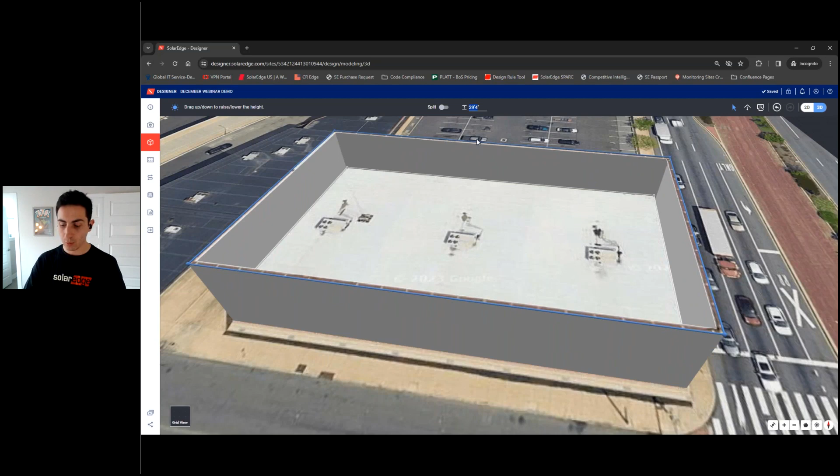That's the outside parapet here. I'm going to use the undo function, Control Z, just like you'd expect with keyboard shortcuts, to bring that back down to a flat roof. If you double click on the outside edge, it's going to highlight everything within one facet. So I'm going to set the roof height for the outside edge to 27 feet and the inside edge to 25 feet.

This is just measurements that I know in advance for the webinar here. Now you can see, again, hold down your middle scroll wheel to rotate the image and see how your building looks.

I'm going to go back to 2 dimensions, and now we want to add some obstacles on the actual rooftop itself. Under Draw Obstacles, you just click there and then click on one corner, hold and drag to create a rectangular area around your obstacle, in this case this little AC unit. I'll make another obstacle for what I think is a rooftop hatch.

So copy and paste again with your same keyboard shortcuts. You can Control C, move your mouse to where you want to paste, then click Control V. I'm going to delete that to show you one other method.

First, we'll go over here and set the height of this obstacle. The AC unit, let's call it 6 feet tall. The rooftop hatch, probably half a foot tall. Again, we're not going to be super precise in the interest of time in our demo today, but of course, all of this you can go and make exactly the heights that you need to.

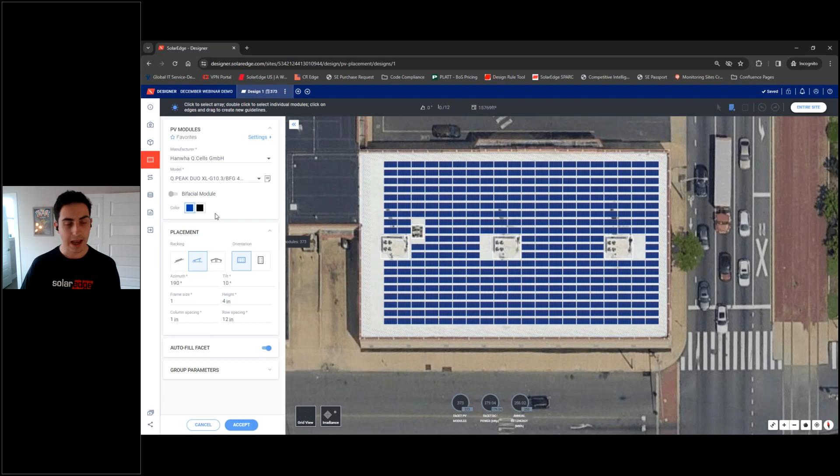So what you can do is drag and drop an area to fill panels. This is one way of doing it. The way I like to do it generally is to use the autofill toggle here, and it's going to maximize panel on the rooftop space. So this is maximizing your space on the rooftop, and then I like to go through and delete panels that we don't want here.

First thing I'll do is grab these panels right next to the AC units and create a walkway all the way through so that any maintenance personnel has access. Click on one module, use the corner to drag to however many modules that you want to capture, and then just click delete to get rid of them.

So we're going to get some space around these AC units so that people can work around them. I'm not sure what this shadow here is, but we'll give it enough space, just in case that shadow is going to affect our modules. You can drag the entire array, but it's automatically going to cut off modules that fall within the keep out areas, if that's the setbacks or the obstacles.

One more feature I'll show you is the irradiance feature. This uses data from the nearest weather stations to estimate how much irradiance you're going to get depending on shading throughout the year. In these yellow hotspots, 85% means you're going to have 85% of the module's absolute maximum production for the year in this location. When you get really close to these purple spots that are more heavily shaded, a lot less production. That's going to help us in deciding which modules we want to keep and which modules we want to get rid of.

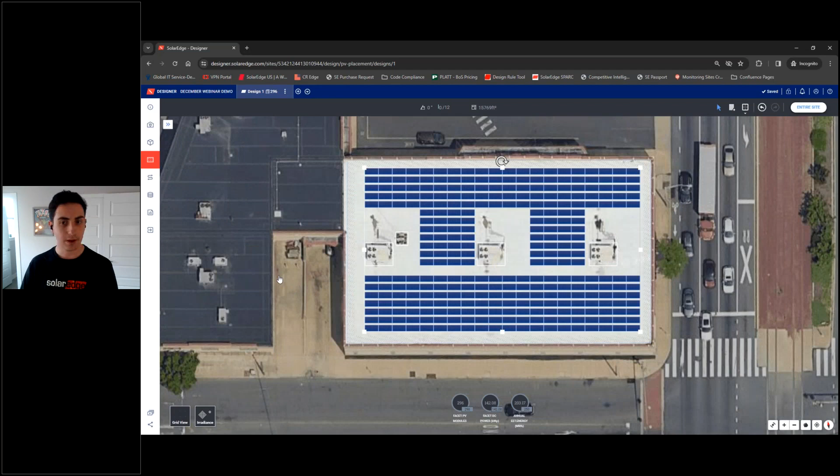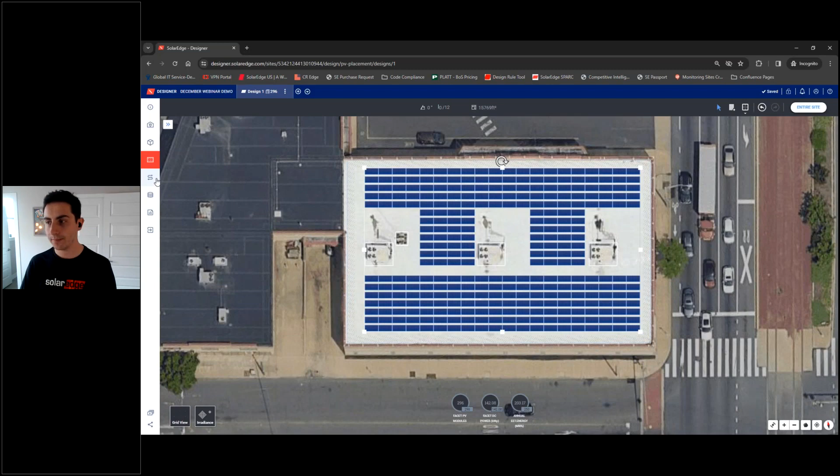So for a quick system, it comes together pretty quickly. I think this is a pretty nice looking array. Obviously, if you want to spend a lot more time optimizing it as much as possible, more than welcome to do that. But to slap an array on a roof in 3 to 5 minutes or less, this is a pretty good start. So we'll move now to the most, I would say, important part of the process, and that is the electrical design.

Right away, Designer is giving you recommendations for what optimizer and what inverter can be used with this site. That's based on two things: first, the stringing zone, and the oversizing.

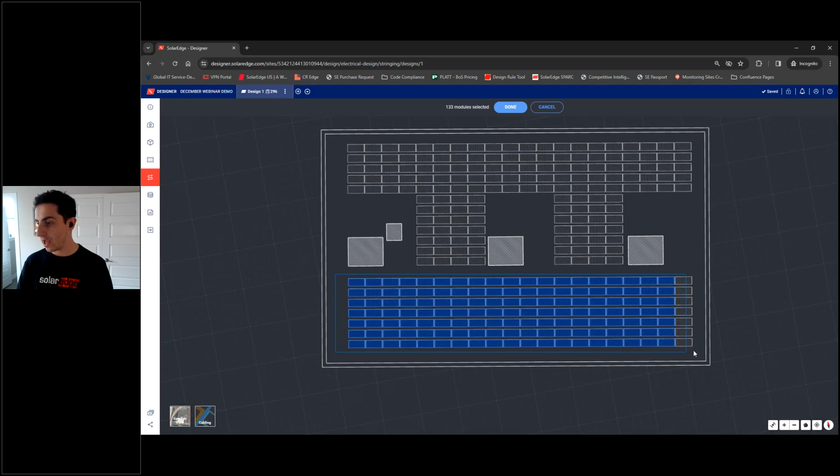So if you wanted to, for example, edit your stringing zone, let's say I just want a recommendation for this bottom subarray. It's going to be 133 modules, and it's going to suggest different inverter sets for you. In this case, 2 SE30s. I think it makes more sense to wire this all onto one inverter. It's a pretty small roof, so we'll reset to all.

And here we can modify what is our desired DC to AC ratio. Let's say we wanted to bring that down to 115%. It's going to change for us what the inverter is that's being recommended. Okay.

Designer is only ever going to recommend you compatible equipment. So given the module we've already selected, it'll recommend only a list of compatible optimizers to go with that module, as well as with that inverter. So everything that's being recommended and selectable as an option, the compatibility concern is taken care of.

So I'm going to select the S1201 optimizer, it's kind of newer, with a little bit of extra features. And then we'll click...

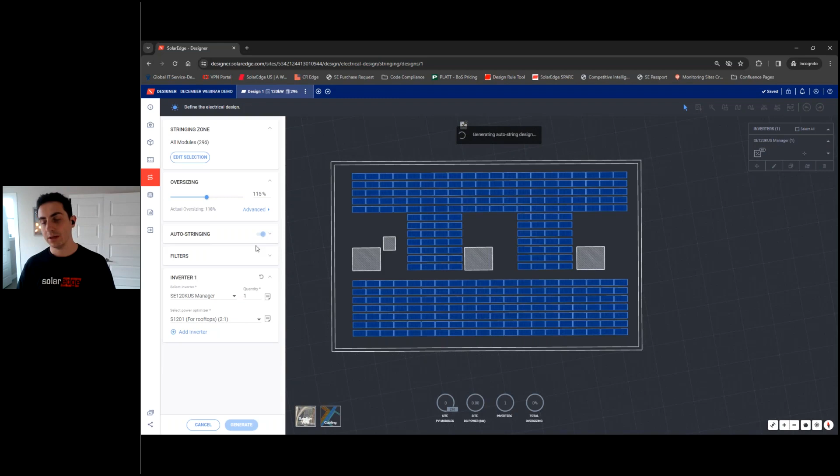Auto stringing. I like to use the auto string to get a basic stringing design built in, and then I can go through and manually make changes as desired. So we'll click generate. You can see a fully strung design is already given to us.

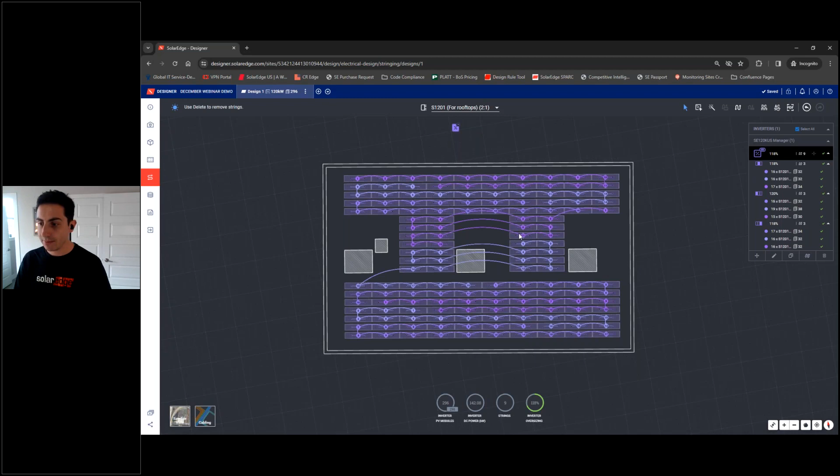What you're looking for in the electrical design section is that everything is valid. So green check marks on every string, every inverter subunit, and the main inverter itself means that this design is considered electrically valid according to SolarEdge design rules. If we make a mistake, something that isn't valid, it's going to pop up an error notification and let us know that there's an error and that the design isn't valid.

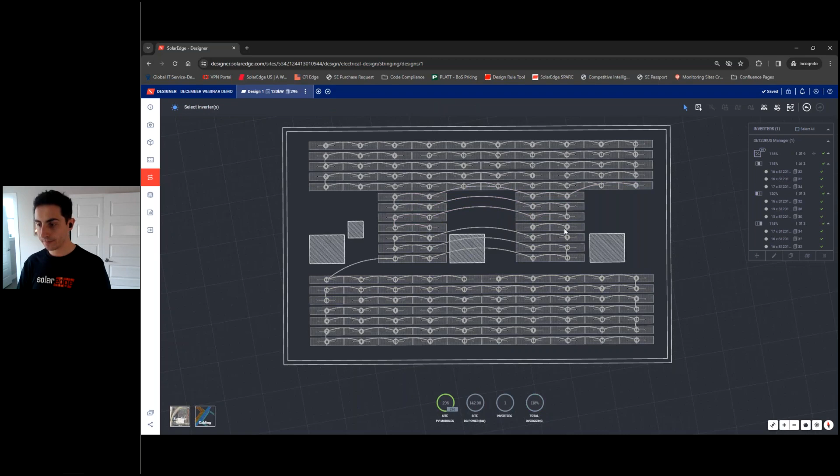What I'm going to do is get rid of these 2 strings because I don't love stringing across the obstacle area. So I'm going to delete those 2 strings that come from this left side unit, and we're going to put those in manually. So how to do that?

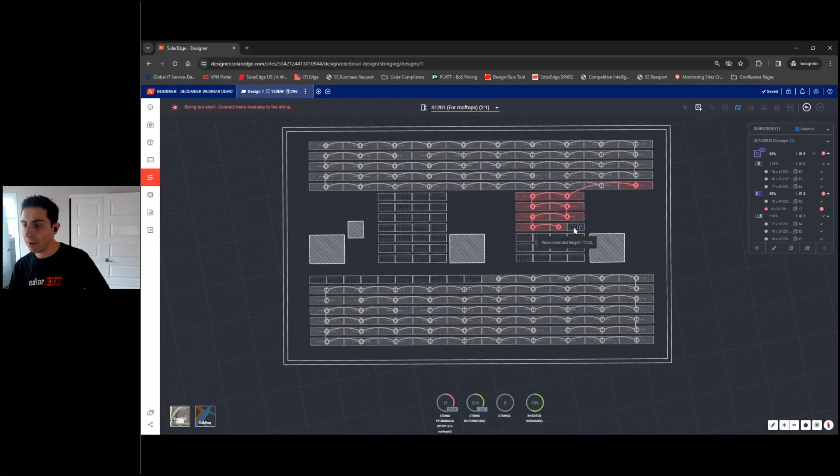The basic way of manually stringing is just a click and drag. You'll click down on the first module that's part of a string and drag to the next, and you'll just go all the way through. You can see right now the string is red because it's too short, and on the right side you can see there's a little red exclamation mark. That error is because the string is too short. But as we build it, make it longer, it'll come within the necessary minimum length for a string. And there we go, that string is now totally valid.

You'll notice that this string has 30 modules and the other string on this inverter has 32 modules. With SolarEdge, you have the flexibility to build strings in parallel that aren't exactly the same length, because the maximum power point tracking is happening at the optimizer level.

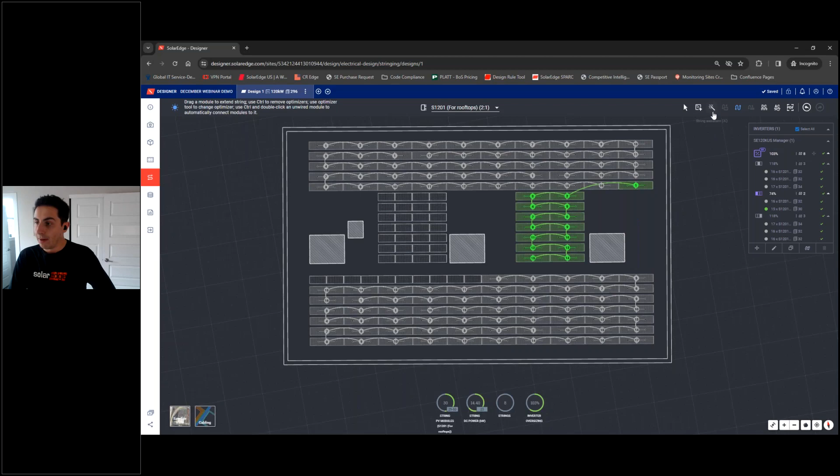As Varsha noted earlier, the magic wand stringing - this is also my favorite way of doing stringing. Basically you click at the beginning of a row, and it's automatically going to string the rest of the row and ask you for the next place to start. So I'm going to click here, and it's automatically going to string us through to what it's decided is the optimal size, 32 modules, and finish the string.

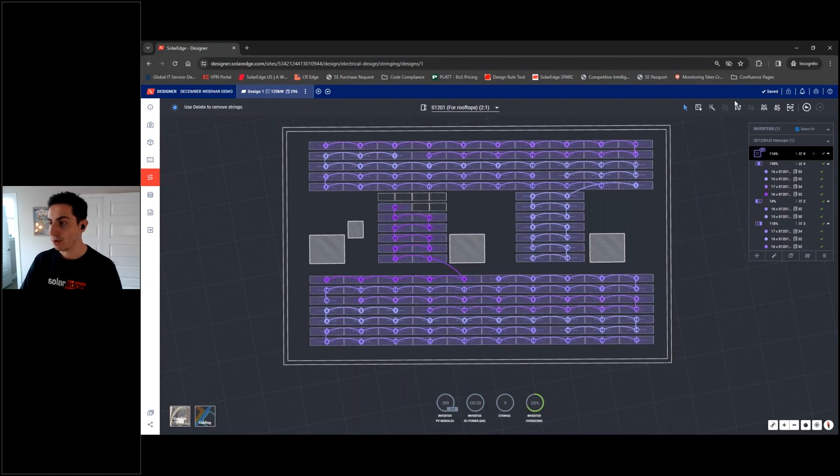What you can do is go back to the manual method, grab the end of this string, and add the additional modules so that the entire system is wired. Again, you'll see this one is a 38 module string. I want to drag that down here so that it's 3 strings on each unit. I think with a lot more time, we might be able to make an even prettier, tighter, more balanced system where every string is the same size - easier for our installers to not get tripped up along the way.

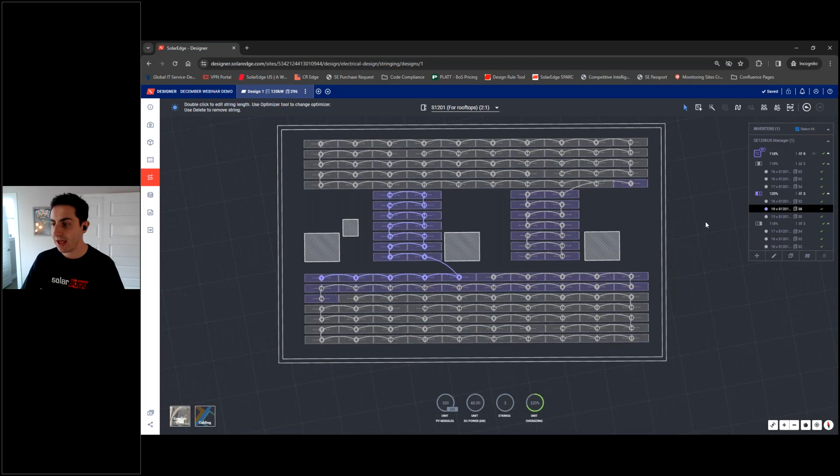But as you can see, everything here is valid, and that's the main thing that we're looking for. I'm going to move over this inverter to a likely ground mount location so that I can show you one other exciting feature on the electrical design page, and that is the DC cabling feature.

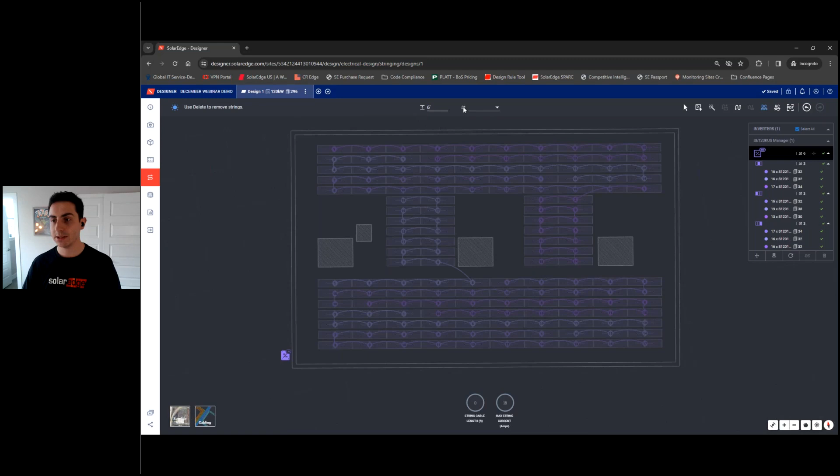So when you click on the DC cabling, it's going to ask you for a relative inverter height. Let's say the inverter is mounted 6 feet off the ground. And what's the cable gauge for our home run? So 10 gauge copper seems likely in this case.

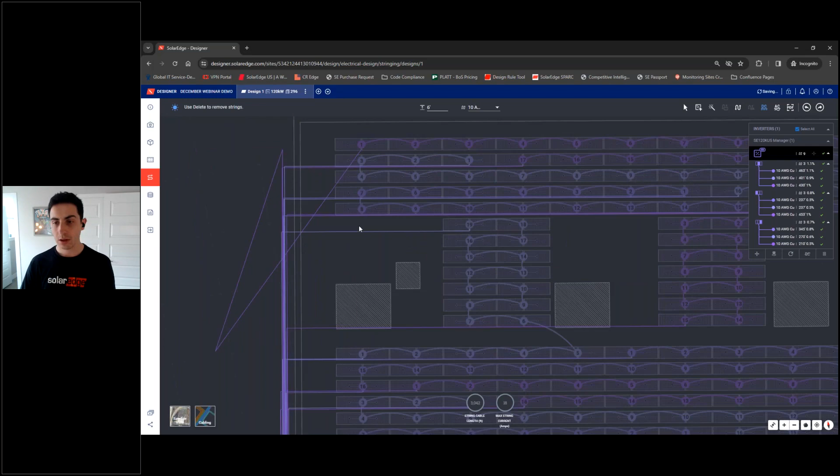And you're going to see that the DC strings here are all laid out from your module strings to your inverter. If you want to route them specifically, you can grab on a string and change its routing. Obviously, no one would route quite like that, but you can just Control Z to undo and put it back to this nice 90-degree routing, which is reasonably likely to see on a site.

You can add DC combiner boxes, and change the string sizing from the DC combiner box.

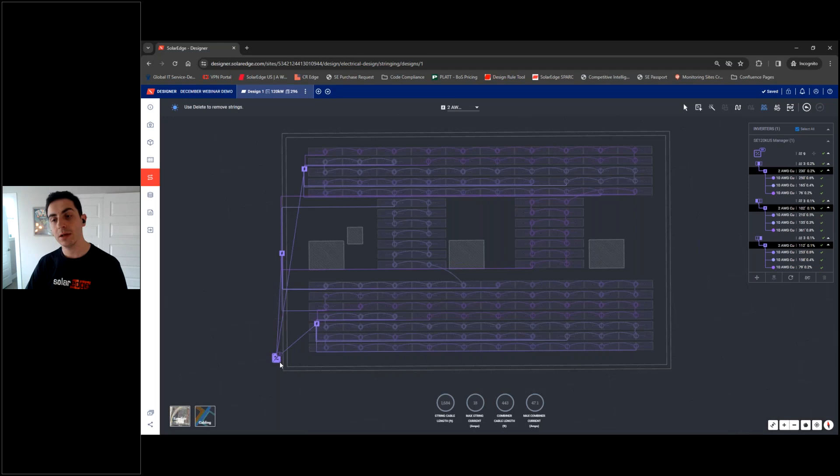We'll probably use something larger if we're using 3 combiner boxes for 3 synergy units on this inverter. So all of this stuff is really nice.

AC cabling side, you have the same features. So from your inverter to your grid interconnect point, you can mess around with the sizing of the inverter cable or the PGC cable. I'm going to clear the AC cabling for now.

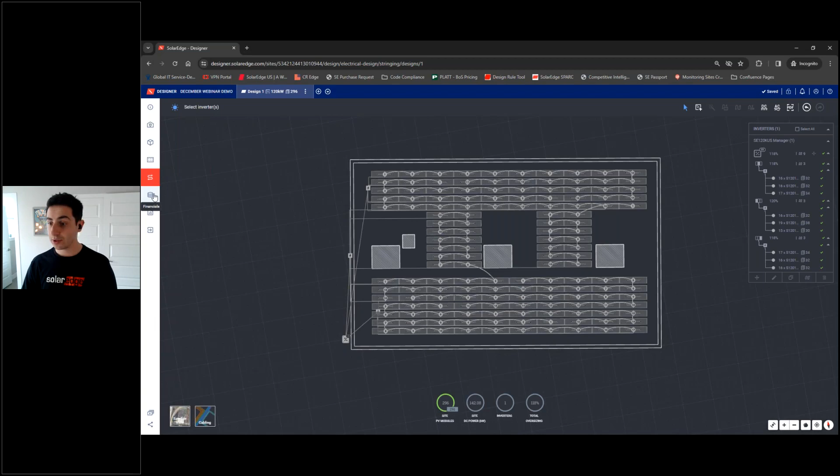All of this is really nice going into our next step, the financial analysis portion. What you're getting from the cabling side is a really solid estimate of your balance of system components—how many feet of 10-gauge cable we'll need for our home runs, 2-gauge cable, combiner boxes, all of those electrical BOS components. The designer can basically create a BOM for you.

You can even export it as an Excel file. You can estimate the prices for those components, and you can save certain part numbers that you use often for those components, all under your profile.

For the sake of time, I'm going to estimate the entire system price. Let's call it $250,000 here, and move on from guessing the CapEx costs of our system.

We're going to add incentives as they are available. Obviously, the ITC is available everywhere in the country, and you can add state-based incentives as well. If you don't have your incentive listed, you can include the specific information about it down here.

All these financial parameters are part of the production simulation and ROI analysis. How long do we expect the system to last? How much are we spending on O&M costs annually? How much does it cost to replace the inverter? This is actually based on the warranty cost in this case.

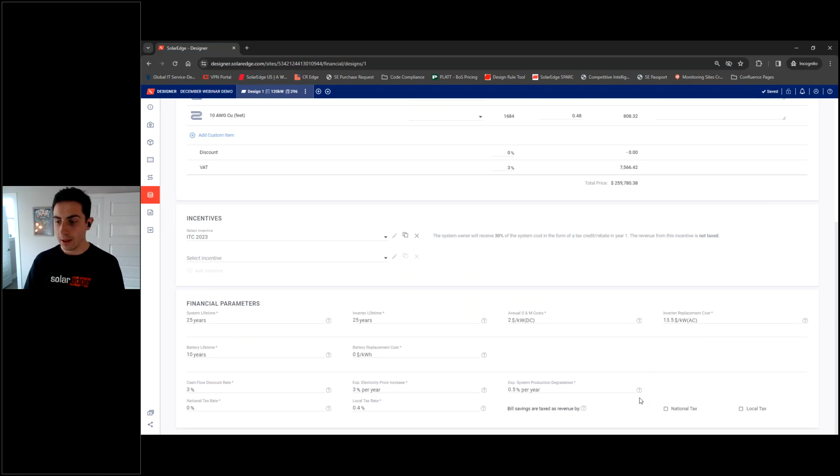Battery is not relevant for this system, but some smaller systems might make use of batteries as well. All of these minor pieces I'll allow you to look through at your own time—I don't want to take too much time explaining each one.

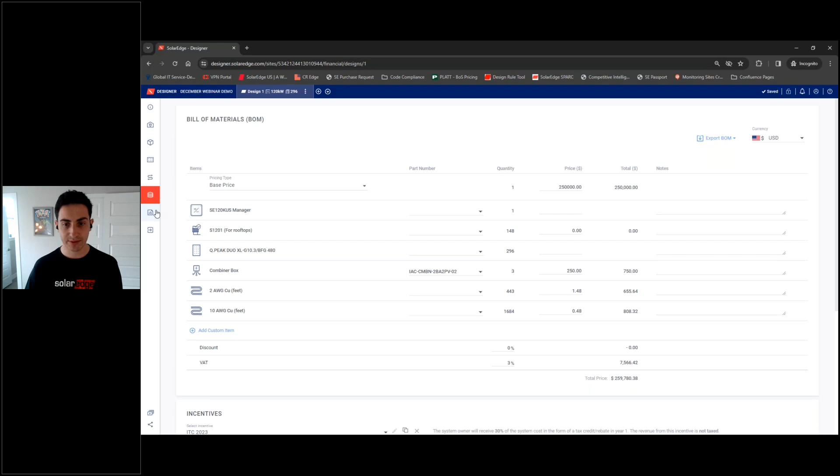But all of this input up till now, both on the financial and electrical design, module placement, everything, builds up to this step, which is our summary and report tab. Right now it's running the simulations, ROI calculations, and generating a report of the system.

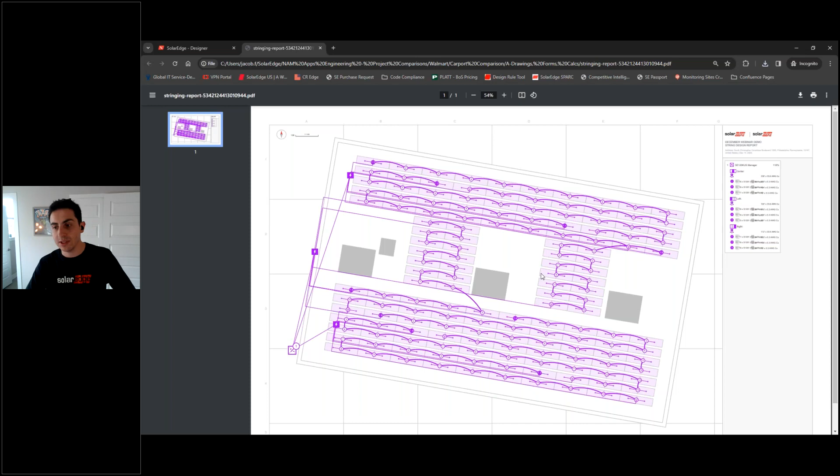So if you wanted to download a PDF or DXF version of the layout, I'll just open it up for us to look at—it's going to look something like that. Same thing in the DXF version. So if you have a drawing set that you're building, you can use this as a basis for that drawing set, or slide it into the drawing set somewhere.

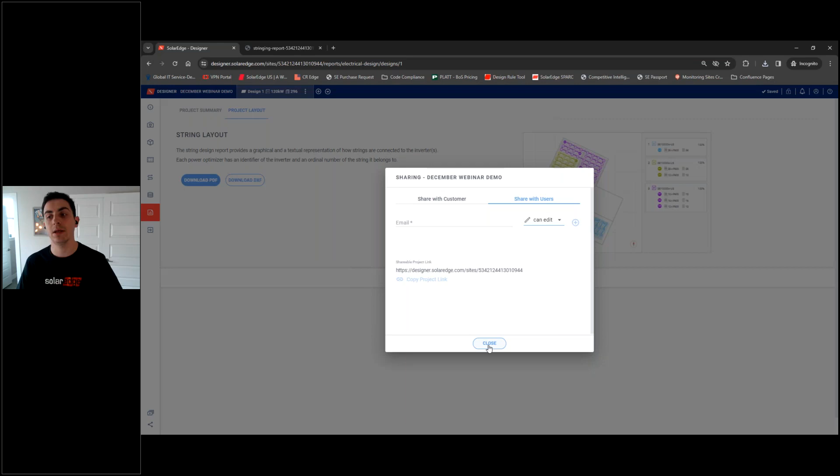Finally, the sharing feature allows you to share either just the proposal, which is what the report looks like, or the link with a customer, or with other users, partners or members of your own organization. If you select can view, then they can view everything, including any of the tabs or inputs. Change it to edit, and they can make changes just as you would as the project owner.

The final step is the export. So once you're all good with your design, you feel confident and it's ready to go, you can export it directly to the monitoring portal. If you've had experience using our monitoring portal before, that's where you're viewing your site live via internet connection, down to the module level, inverter level. How's everything performing? Part of that process is building the layout. So if you've already done the design and the layout in Designer, you can export that directly to monitoring. Makes it a lot more seamless. Once you export, that site will exist permanently in monitoring, so just make sure you double check that everything is how you want it to be laid out.

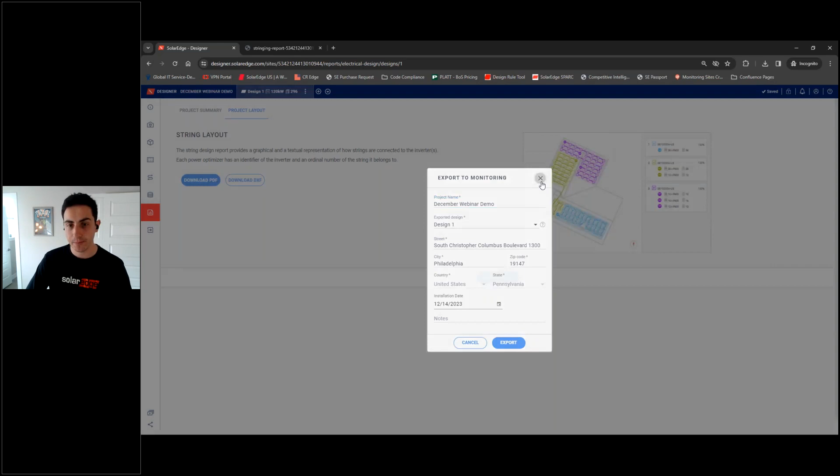So we'll quickly recap what we went through, and then we'll get to some questions in just a minute. Starting with project info, that's basic address, grid information. Consumption's our next step, upload monthly data, or you can just use one of the consumption profiles that's already built in. The site modeling is where we're building the site in 2 dimensions and 3 dimensions, including external shading objects, obstacles on the roof, things like that. PV module placement, that's where we're building the array onto our surface, onto our site.

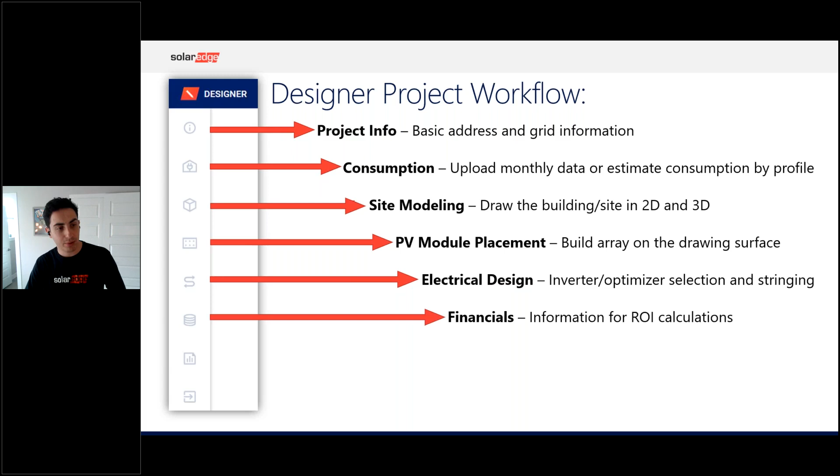Electrical design is where we select the optimizers and inverters. We do all of the stringing to make sure it's valid according to SolarEdge design rules. The financials is where we input all of our information to do the ROI calculations. And then finally, summary and reports, that's where we get our results from the simulations and the financial calcs. And the last step is the export.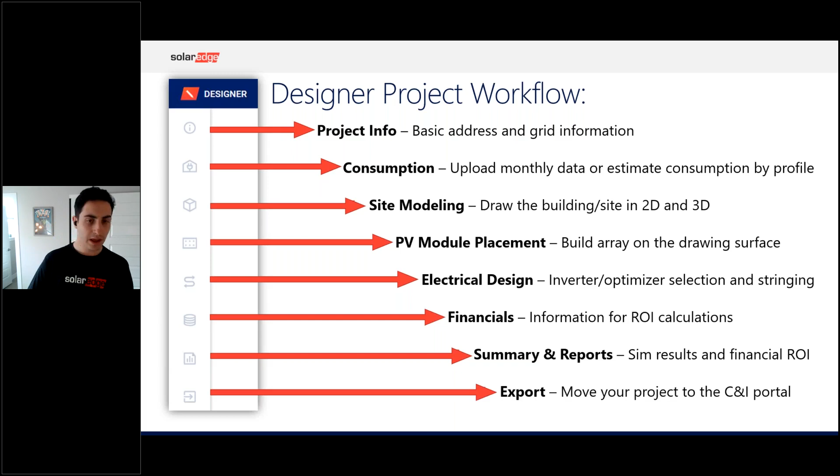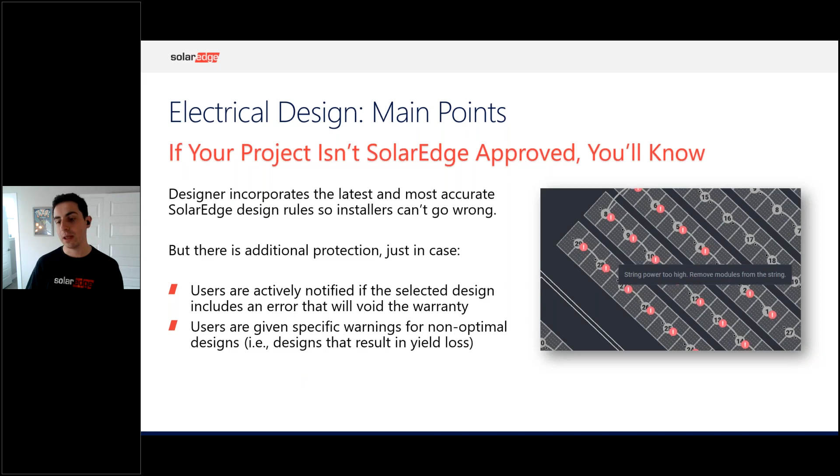So I just want to highlight this main point one more time. If your project isn't SolarEdge approved, you're going to know. These red exclamation marks come up, they'll tell you exactly what the issue is, and if you hover over them, string power too high, for example, in this case. All of our latest rules are constantly being updated, so you can't go wrong. You'll be notified of any violation that will void warranty. We also have little orange exclamation marks that come up sometimes, and that's just going to point out where there are non-optimal designs, still valid designs, but they might result in a loss of production.

So some of our key takeaways. Number one is that Designer is meant to streamline your design process. A lot of automated features and tools help to reduce the labor involved, saving you time, ensuring accuracy, and optimizing the system for SolarEdge products. It enables real-time collaboration. You can work with other team members at the same time to make sure that everyone is on the same page with how the system is being designed.

Easy import of AutoCAD files. If you want to upload an existing DXF into the Designer suite program, you can do that and work off of that as your basis for your drawing. And last, there's detailed project documentation, string layout, mapping assistance, simulation, and all of that is to ensure accuracy and that you have all the information you need to optimize the performance of your system, optimize the energy production.

So I want to note a couple of the exciting features on our Designer roadmap. First, as I showed, is the DC and AC cabling feature. You're going to be able to do your DC cabling layout, your AC cabling layout, and create an estimate of your electrical balance of system components. That should be widely available by the end of this year.